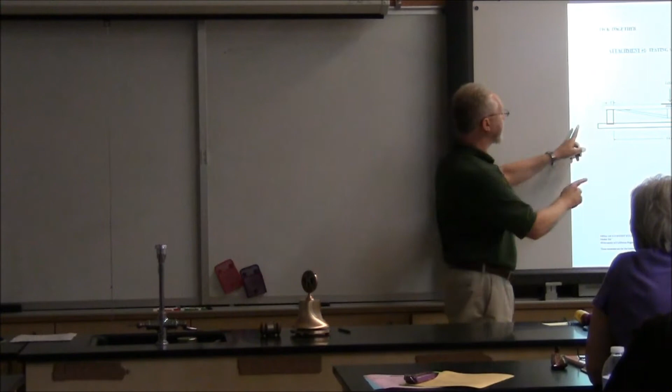So here are the dimensions for the bridge. Actually, let me pop down to the picture. Yeah, so this is basically what our test stand's going to look like. It's made of 2x4s. We have some vertical supports here, these 3 pieces of the test stand. They're spaced 14 inches apart, and the students have to build a bridge that spans this. Then we put our testing apparatus on the top there, load it up, and see when it breaks.

And so the dimensions are here. I won't go through them all in great detail, but we have a maximum length, maximum width. This is the only bridge type where we need a roadway; the other 2 bridge types don't need a roadway, but this one does. And so you have limitations on the roadway. Also, what's unique about the popsicle stick bridges is the type of construction you can use is unique to the bridge type.

Let's see, some other rules. It has to be labelled. Make sure there's a label on the bridge. There's no kits allowed. I haven't seen a kit out there. I don't think I'd recognise one if I saw one. So just take some popsicle sticks and build the bridge.

This is one of the most confusing rules. This is the 50% rule. So we'll just assume that this is a popsicle stick. It says that a maximum of 50% of the craft stick's total flat surface may be glued. So the craft stick has a top, has a bottom, and then has an edge around it. The edge is not included in the 50% rule.

Because you've got the stick with a top and a bottom surface, 50% of the stick's flat surface is on the top, and the other 50% is on the bottom. So that's 100% of the total stick's flat surface. And so if you take another stick and you glue it on there, so that the top of the stick is totally glued and covered by another stick, then that's it. You've glued 50% of the flat surface. You can't glue anything else. So if anything is attached to the bottom of the stick, you've just broken the 50% rule.

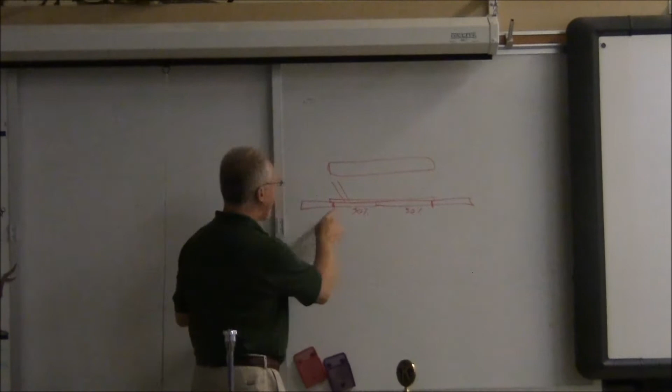Okay. The bottom 2 sticks: this stick has half of its stick glued to this one and half to that one. So you can actually attach something else here, because even though it's 50% of the bottom surface, there's another 100% there. So this 50% actually only represents 25% of the total surface. So you can still continue to glue more on here, or you can glue something on this one, and that's okay.

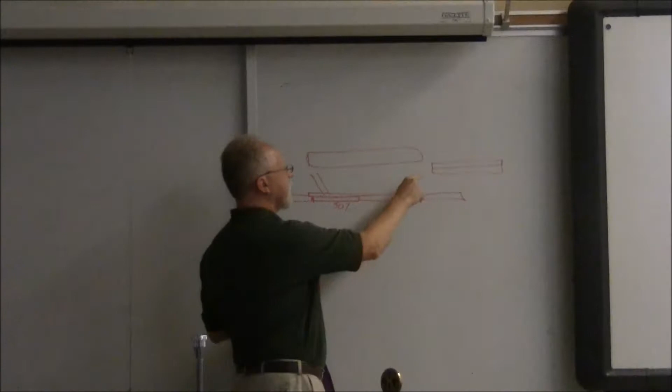So we don't really go through and look at all the sticks to make sure that they're all exactly 50%. But what you want to avoid is having sticks where there's 2 sticks totally glued on top of each other like that. Lamination? Lamination, exactly. That's what we call lamination. Because now both these sticks have 50% of their surface glued, you can't attach them to anything else. So this pair will just be floating in space. They can't be attached to anything, unless, as you said, you attach to the edge. But that would be very weak.

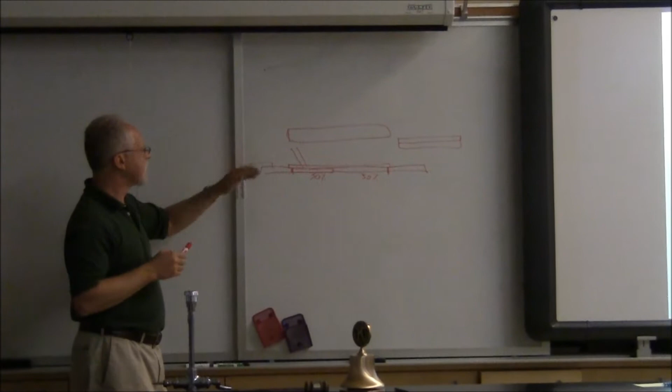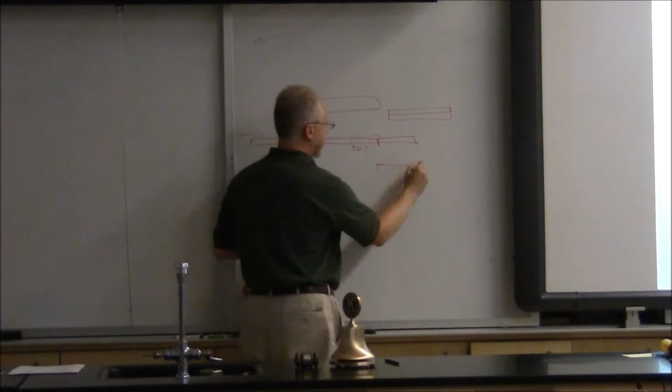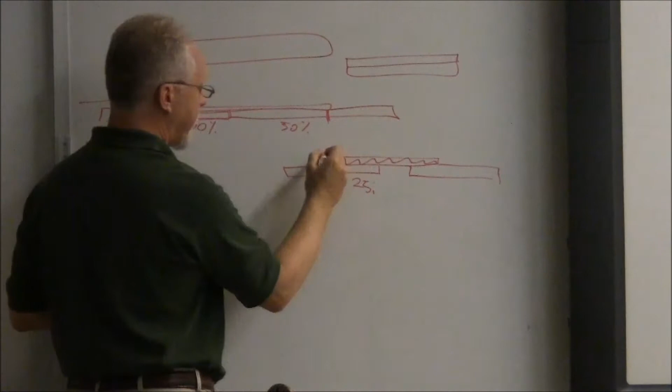Okay. So that's the 50% rule, and then you can do the math with other things. 25, 75, 33, 66. You kind of get the idea. And then again, that's eyeballing too. So if we have a stick that's like this, and we bring one down, and this one is attached 50%, this is actually 25% of this red stick. Because there's 50, there's 25, there's the other 25. You can actually glue one here and have half of that. So there's still a little bit left, so you can actually do the rest of that with another stick there.

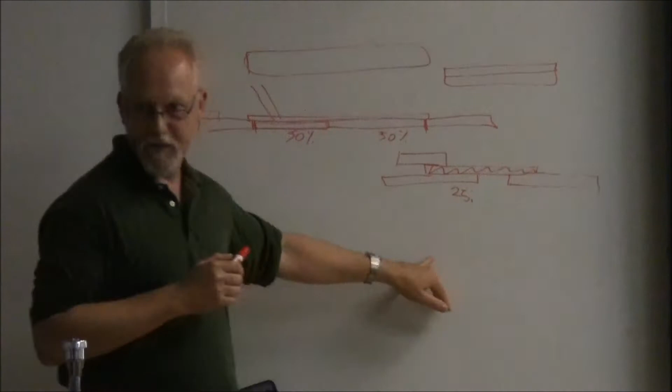So we have to look at each stick, but we don't usually use a ruler, we usually just eyeball it. So what you want to tell your kids is don't make us think that it is. Don't make it look close enough that it actually might be disqualified. Okay. Is the 50% rule clear? Mm-hmm. Yeah.

On this glue again: no coatings on the bridges. So when the bridge is built, you can't coat it with anything. Don't paint it. Don't use hairspray, like some kids have done in the past. And also that applies to the glue too.

So tell the kids to build a nice, neat bridge, and only use glue in the joints. I know in the past there's been a lot of excess glue on the bridge, and the kids just paint it all over the bridge, thinking just to get rid of the glue. But that actually makes it a little stronger, and it also breaks the rule that the bridge isn't supposed to be painted with it. So it's better to tell them to take a damp sponge and wipe the excess glue off. Don't leave it to dry.

We also noticed in the past a lot of the kids use newspaper. They want to protect their parents' table, so they build it on a newspaper. And of course the paper and wood are the same thing. So when the glue's dry and you go to lift it off, the paper's stuck, they tear it off, and there's little strips of newspaper everywhere. But we can see it's not an obvious attempt to strengthen the bridge, it's just how they made it. So that's okay. Tell them not to fret too much if there's little bits of newspaper everywhere.

Bridge has to be open at the top to allow... see, this bridge is a different sort of bridge style. There's no picture there, so I'll grab the picture now, because I think everything else is the same. Oh, no, one more vital difference with this type of bridge is because of the roadway, over here.

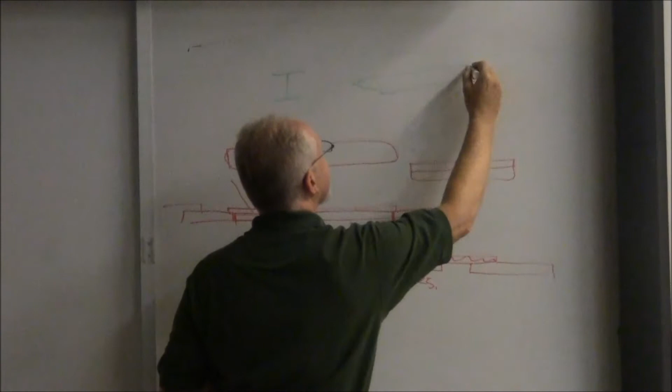I-beams are illegal. An I-beam is something that looks like this. If you look at a typical girder that you'd use in construction, it looks something like this. That's what we make our buildings and bridges from in the real world. It's 3 pieces of steel welded together like this, very strong. If you look at it from this direction, that's why it looks like the capital letter I. So that's what we call an I-beam, where there's 3 sticks glued together on the edges.

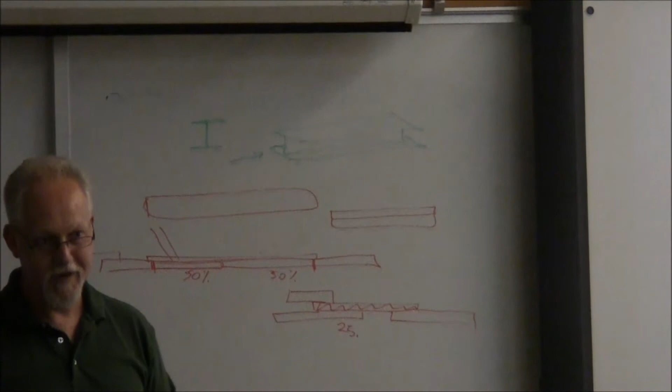Even though that's great on a real bridge, we don't want that in these bridges because the bridges are already getting to 300 pounds. If we used I-beams, we'd break our test apparatus. Our limit on our scale is 450 pounds. So that's the main reason the I-beams are illegal. But T-sections are okay. So if we take away one of those sticks and make it look like a T, that's okay.

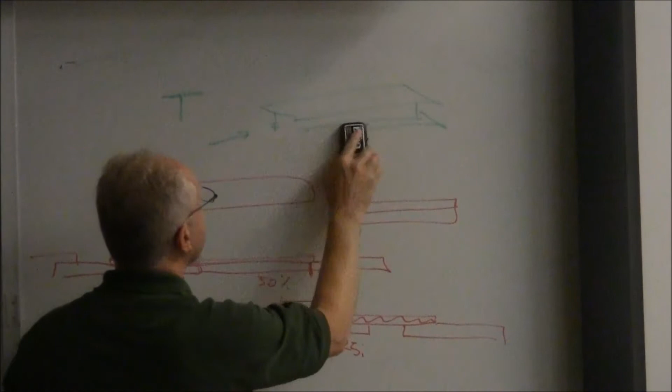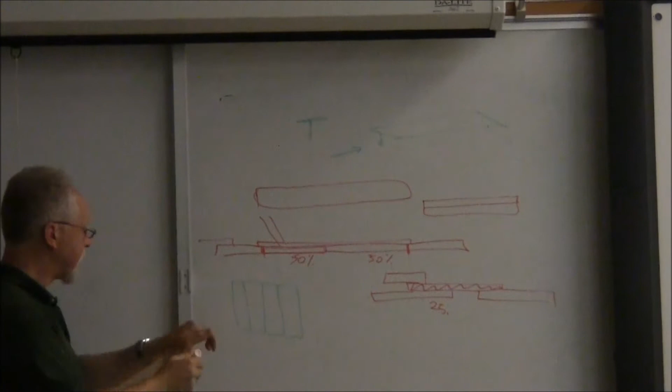The roadway is special compared to the rest of the bridge. We actually encourage that you use the sticks like this, looking down from the top, with all the sticks glued along those edges. This would be the roadway, because you have to have a smooth, continuous roadway for traffic. In previous years they always said you could bring a Hot Wheels car or some little toy car, and as long as the car can roll from one end of the bridge to the other, that's a continuous roadway.

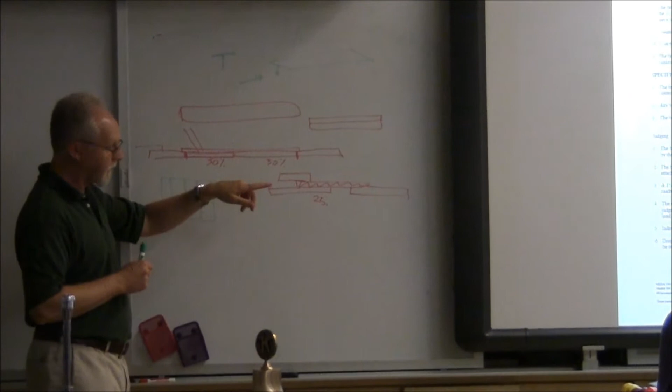Because in the past, some kids, I guess fighting the 200 stick rule, made a roadway that isn't continuous; it looks more like a ladder laid down. But this style of bridge must have a continuous roadway. And the roadway is the only place where you can do this horizontal lamination, where you glue the sticks right next to each other.

But because those sticks are all glued on their edges and they're extremely thin, this whole structure is very weak. So you want to reinforce it underneath, looking from the edge of the bridge. This is where you would use these other sticks that come under here to support the roadway from underneath. If you look at those from the end, that's why they look like this T-section. But tell the students, don't be tempted to put another layer of sticks underneath there, because that makes the T into an I, and that's going to be illegal.

And that's it for the rules. So let me actually do this. I'll get back to main screen. Escape, maybe? Escape, and then,

so these are the roadways that I was talking about on these bridges. This bridge doesn't have a roadway, so this one would be disqualified because it doesn't have the roadway. Neither does that one there. And you can also see that these bridges are very long and spindly, they don't look very strong, so they wouldn't have tested very much anyway.

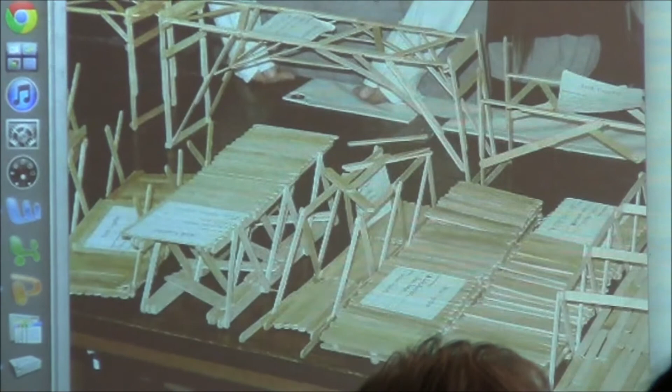So the best way you can do that is you have access to some wood. You can build your own test stand that looks just like ours, just some 2x4s. With the vertical parts spaced 14 inches with 3.5 inches high, just as you see in the rules there. Click.

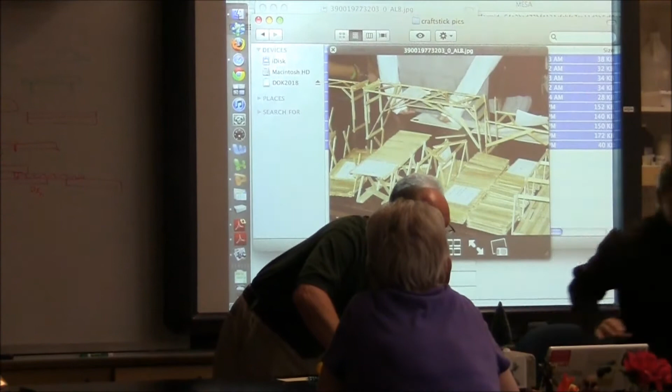Here's some more. And here's an interesting looking bridge. Looks like a stack of pancakes. And as you can see, they tried to make the feet strong, which is a good idea, but then the middle was kind of weak. And even though this looks like it might be illegal, actually it wasn't. It was okay. But it came out very heavy, and then when you do the strength to weight, it didn't actually come out very good.

This one again has the nice roadway, but then you can see these pieces down the bottom here are kind of weak, so you may want to think about some ways of strengthening those.

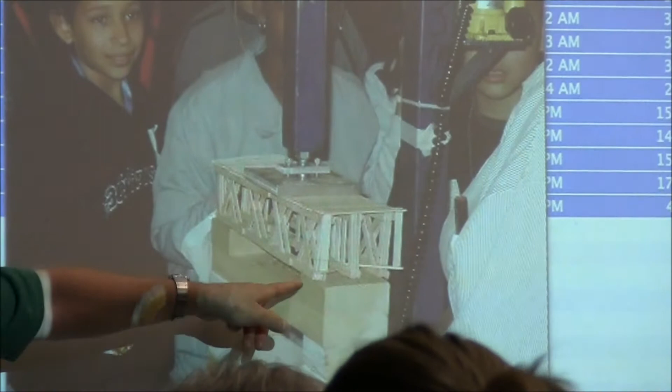Here's a shot of one of the bridges on the test stand. So here's our 2x4s that are made to span there. You can see how the bridge is resting. So there's 3 little rows of cross sticks there holding the vertical supports, and then there's the roadway. So here's our test stand with the test plate. The test plate comes down the middle of the roadway there, and then we start loading it up.

And also what's important here is that these 2 legs here are exactly flat and parallel, because otherwise if it's not on the test stand and if it starts to rock a little bit, that's when all the forces start to get asymmetric, and that's when the things start to fail. So the best thing for any of the bridges is you want to have, actually let me go back and start with a little bit of design principles.

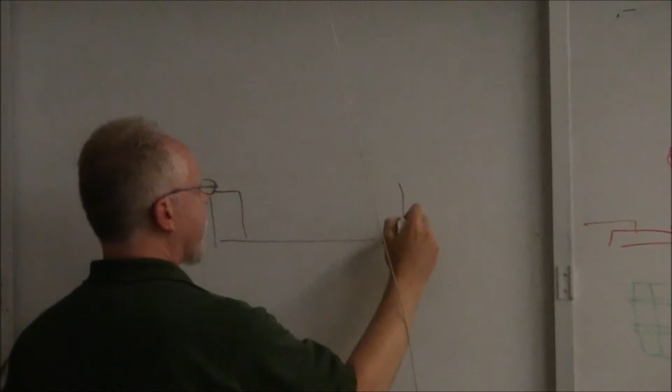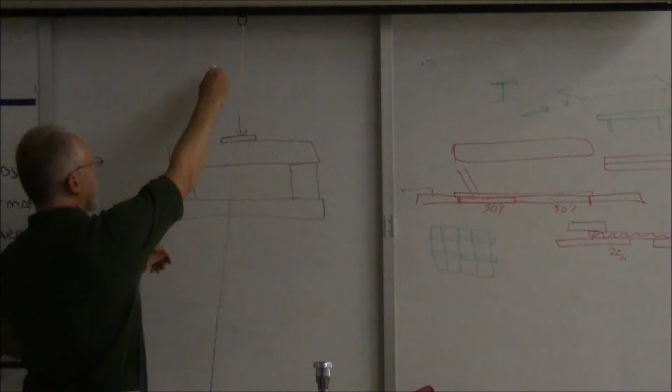So all the bridges are going to have the same sort of testing, where we have the test stand. I'll do the bridge in a different colour. Whatever your bridge looks like, it's going to be some sort of box-shaped thing. And then we have our test plate goes on the top, and then we apply a load this way. And because the forces are equal and opposite, when we apply a load this way, the bridge via the test stand pushes back this way.

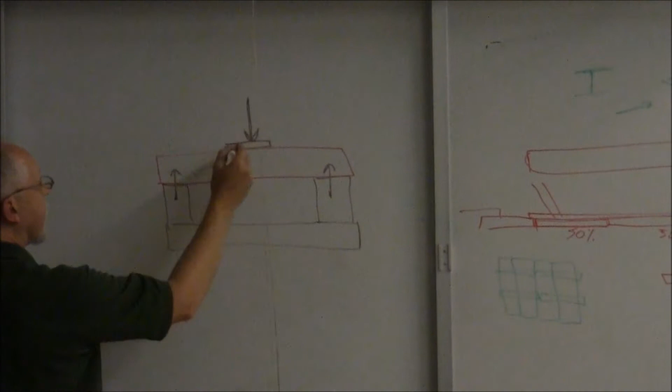And because we're loading in one point there, and then the test stand is pushing back at 2 points, then the force is divided equally between these two. And so basically you can imagine a vector coming down from the applied force to each of the test stands pushing back. And so there's going to be this 50% partition between each of the legs of the test stand.

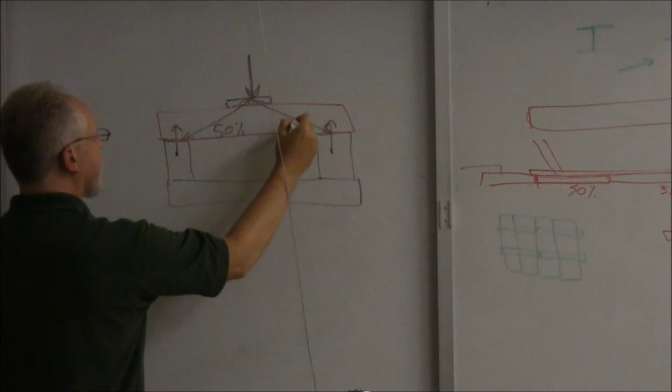So, and I'm saying that because your bridge has to be exactly symmetrical around that testing point. So if the left of your bridge doesn't look like the right of your bridge, then the structures on the left and the right are not going to respond to the forces equally, which is what you want. So the strongest bridge is going to be a symmetrical bridge.

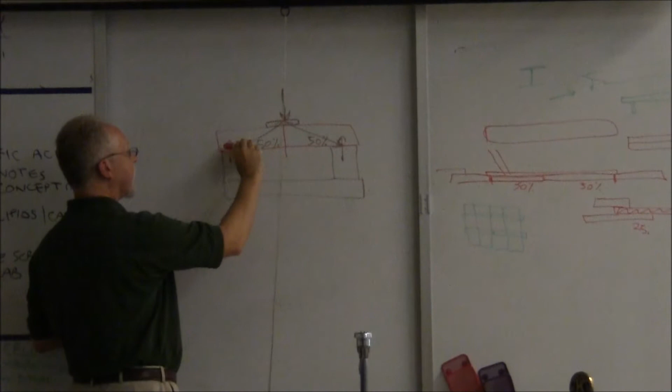And whatever else is in there doesn't really matter. The most important thing is to make sure that everything on the left and the right is symmetrical. So you can imagine if you put a mirror here, then what you see on both sides should be exactly the same. And that will be the strongest type of bridge, regardless of what the design actually looks like.

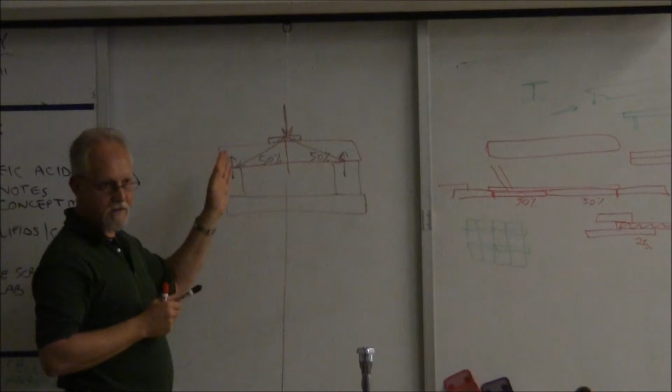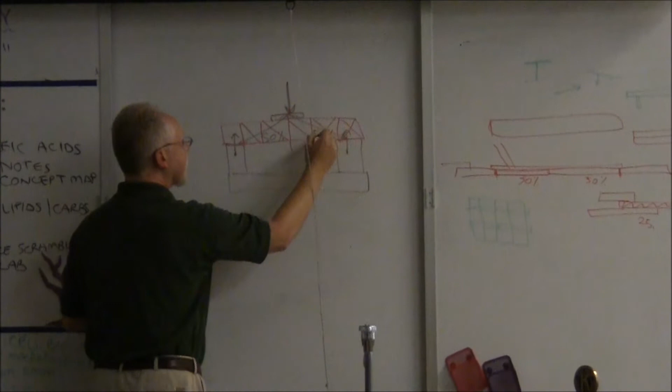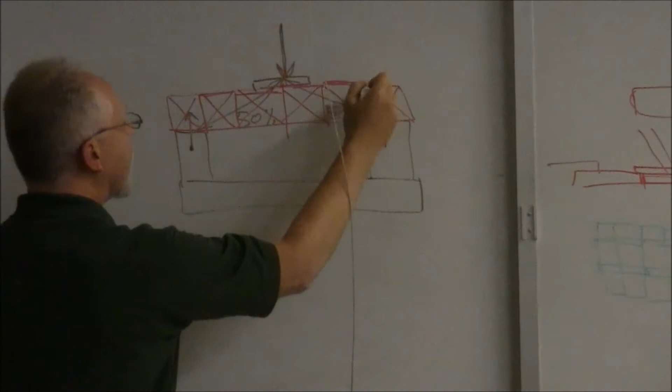Because one of the things with the cross sticks, and especially with the balsa wood sticks, is when the students start making typical box sections where they use diagonal reinforcing or even cross reinforcing, if these sticks aren't exactly the same length, if you look at it up close, you'll see that these things might be up and down, a little higher over here, and then when you start to load it, this is when you start to get asymmetry in the forces coming to the test stand.

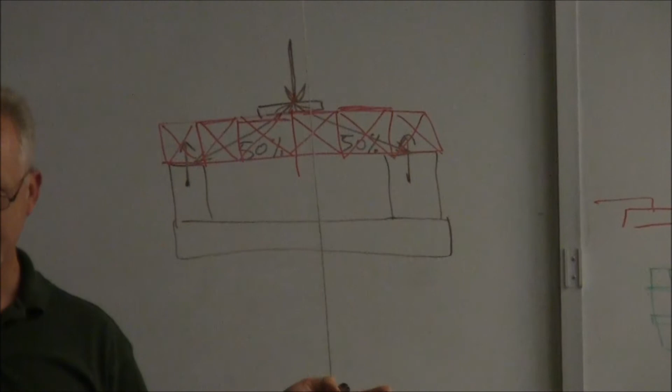And then it's just like standing on one leg. If you hold 500 pounds with 2 legs and you lift one leg, suddenly I'm holding 500 pounds on one leg. So it's very different, right? So you want to make sure that everything is all balanced.

We often see when we start to test the bridges a rotation in some of the bridges. That rotation is a great indication that something wasn't symmetrical. And when it starts to rotate, you start to get transverse forces coming in, and then it usually fails very quickly after that. And the strongest bridges, the bridges that we've tested at 300 and 400 pounds, have always been beautiful and symmetrical.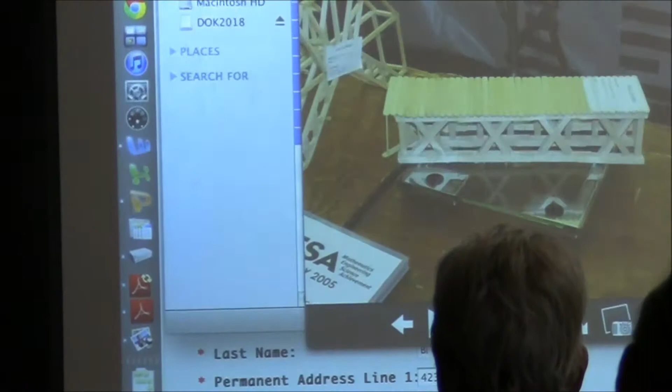Here's another nice example. There's the roadway, and the discoloration here is the label with the school and the name at the end there. And underneath you can see there's a nice strong cross bracing with 3 or 4 layers of sticks. That's all legal, and they've actually tied these sticks with some other pieces along here. And these sticks down here are only glued at the end, a very short joint to its neighbour, and that's all fine. That's all within the 50% rule.

And this is a good design because when the test stand comes up under here, there's a lot of structure to channel the force from the top of the bridge to the ends of the bridge, and it's tied up in the middle as well. So these are good, strong sort of designs.

There's another nice one. Looks very similar to the previous one, except this one they've made it bend down a little bit. I'm not sure that does anything for the strength of the bridge, but it does change the appearance. Don't forget, not only is there strength to weight, but there's also creativity and craftsmanship. So if everybody's bringing rectangular, square bridges and someone brings something like that, it's going to get the judge's attention. They go, hey, this is a nice design. It looks a little different.

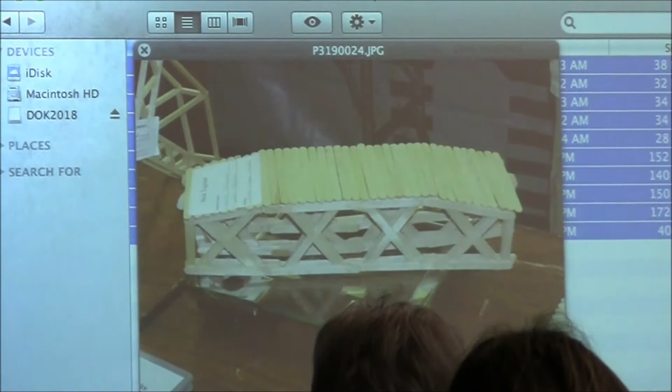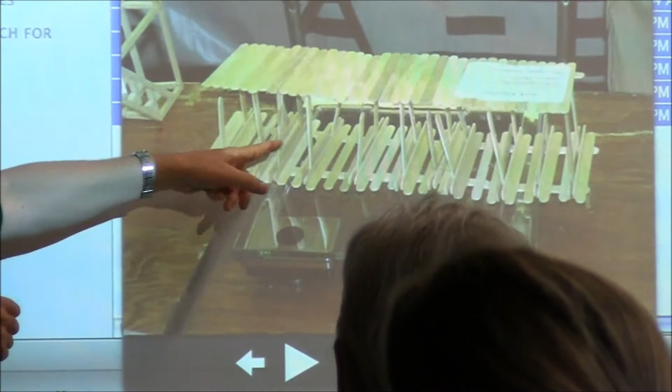This one, is this a strong bridge? No. Because it's just got these little vertical sticks, and they're going to snap, and they're not joined to their neighbours. It would have been better to take a lot of these sticks out and make sure these vertical ones were all joined to their neighbours, so they're stronger. So your job as an advisor is to help the kids understand what's going to happen to the bridge and the forces involved, and even though this might look like a nice bridge to them, it's not strong.

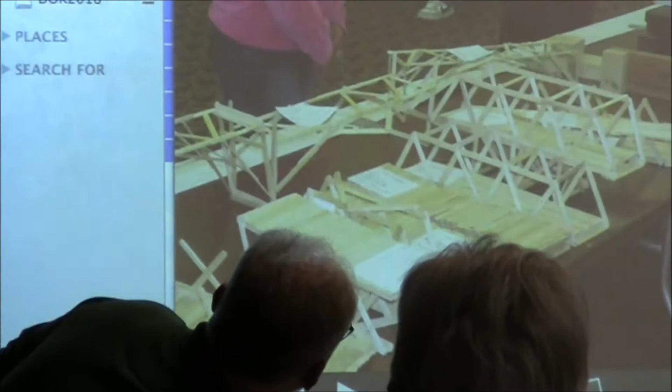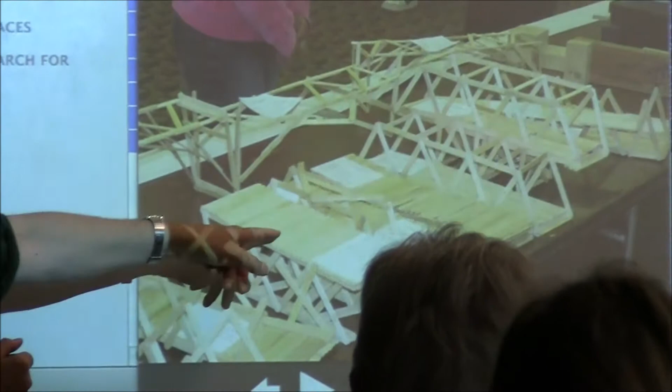Another selection of bridges here. Yeah, so here's one where there's one of the rules that says there has to be a clear and unobstructed access to the roadway, because we're supposed to put the test plate on the roadway. So see this bridge here, the roadway is down here, and then we can't get the test plate through the structure because of these diagonal braces across here.

I think I'll stop there and move on to the next one.

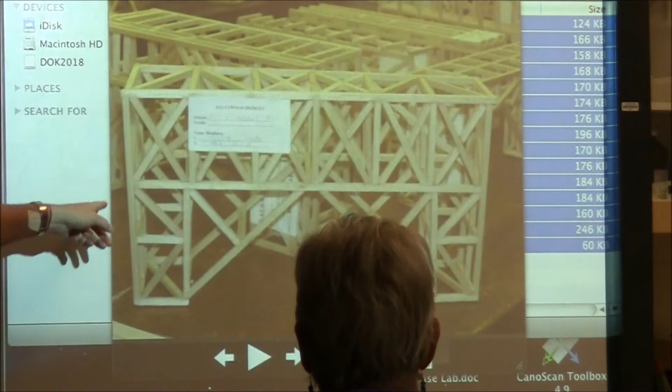It's very brutal. So the balsa wood bridges are the nicest looking bridges, I think, in our competition. And you get some really nice looking structures that actually start to look like real suspension bridges. So this is a very nice one. And one thing I'd like to call your attention to on this one is notice the symmetry. Look at the left of the bridge. There's the middle of the bridge, the left and the right. Very, very symmetrical. This is a very nice bridge.

And one thing that we've always seen in the past is, actually it's a golden rule always, the bridges that win creativity and craftsmanship always win strength to weight. And the reason is because a symmetrical bridge is usually a neat bridge. It's a nice looking bridge. Everyone looks at it and goes, ooh, that's a nice bridge. And because it's symmetrical, it's very strong.

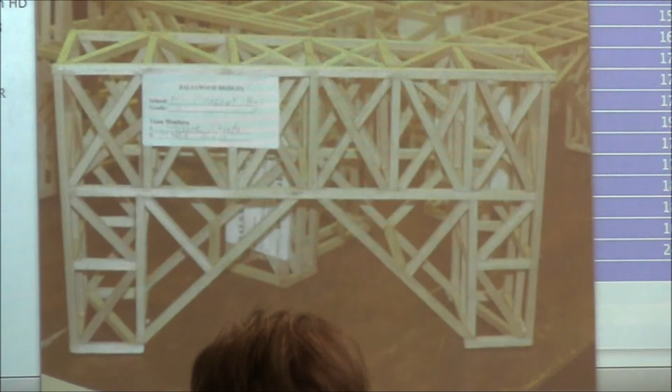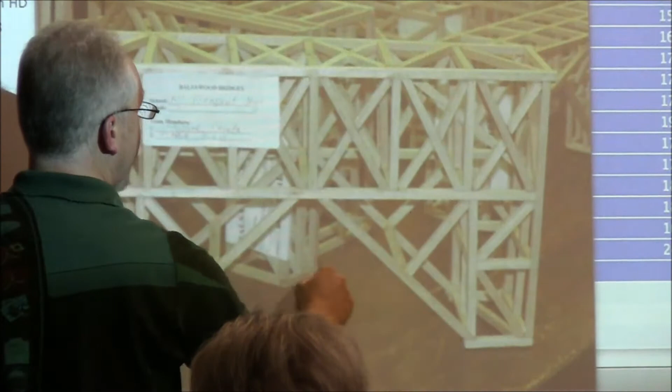You can also see they've done a lot with the, this is where the bridge is going to sit on the test stands. They've got some nice diagonal members taking that force from the test plate down to the legs. And there's lots of little support structures to make sure that's a nice strong connection. So this is good.

Here's a variation on the theme. This is kind of like a skinny bridge. This bridge reminds me of those moving billboards they have on trucks, right? But this is fine. There's nothing to say the bridge has to be big and wide. And so what they've done is, instead of making the bridge unnecessarily wide, they've made it narrower, and now they've got triple strength here, right, instead of just a single beam or a double beam. So this is good. So you want to start getting your students thinking about that too.

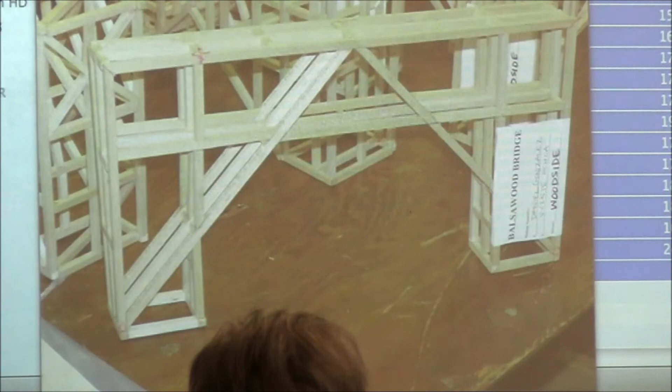Don't make a bridge that looks like everybody else's bridge. Think about where you've got a budget with this bridge. 95 grams is how much balsa wood you can use. So you have to put your wood where it's going to do the best job in resisting the load from the test plate. So this one is very well thought out.

It's like, well, the plate's going to go here. We want to transmit the force to the legs, and then we'll make the rest kind of look like a bridge. And these are very long and skinny, so they're very weak inherently. So you have to try and reinforce them at various points. You could also put more pieces in here and try and reinforce this. So this is a nice sort of style.

And there is a minimum of how wide the bridge can be, and they made the minimum, but they didn't go to the maximum. And so they used their wood budget very carefully to go for strength rather than width. Which is strength to weight, right? It is strength to weight, yeah.

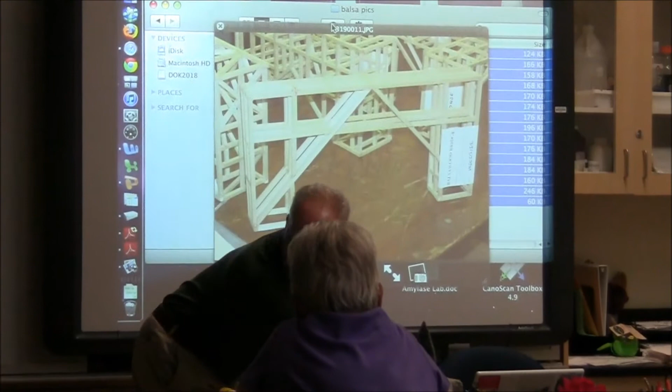So if you did 95 grams of wood on a scale, how much would the glue add to it, do you think? About 10%? Oh, well, I misspoke. It's actually 95 grams constructed. Right. So that includes the glue. And the tag. The tag is minimal. And actually, it just adds all up. You laugh at it. Actually, what we've done on some days is if it's 96 grams, we take the label off and weigh it again, just to make sure it's not the label.

So the glue would add another 10, 15? The glue is typically about 20% of the weight. Yeah, because balsa is very light. The craft stick is less, but the balsa is very porous and very light. And so the glue actually becomes a big percentage of the total mass. Yeah.

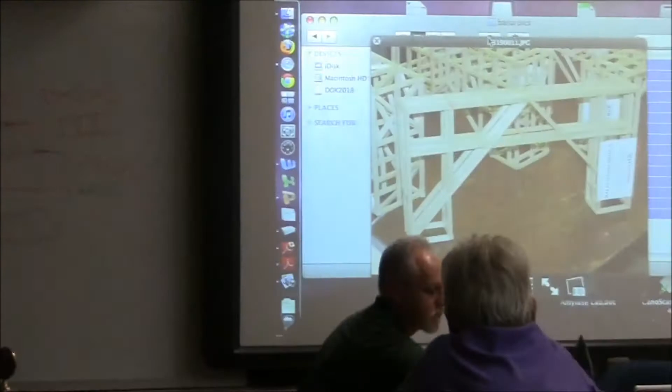Here's another nice bridge, more of an open structure, but again, notice the symmetry. Beautiful bridge. And they've got the same sort of structure. You know, they've got a strong thing here with some diagonals going down there. And then they put some cross pieces in to try and strengthen all these pieces here, which is good.

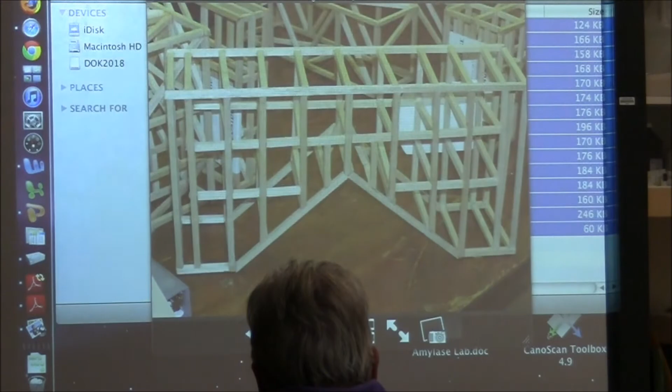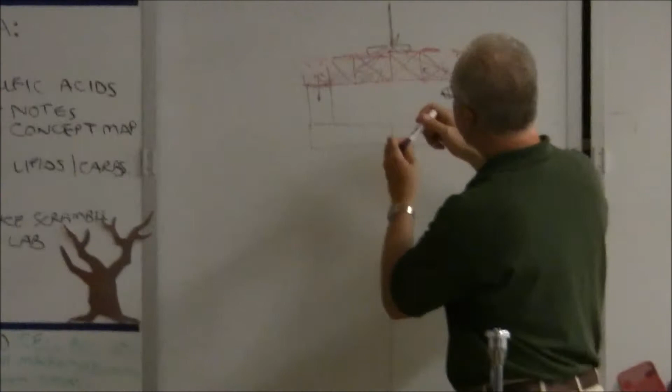And don't forget, like these corners here, they're really not involved in the crushing, because the forces go this way, and anything that's sitting out here in this area is usually not supporting this unless it's tied to the pieces that are going to get broken. So you can imagine that as the forces start to get applied here, you've got some pieces coming down here, and so we've got a compression force coming down on this one.

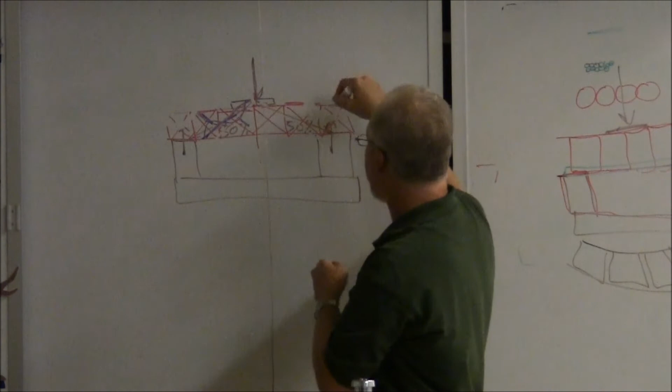And so what's going to happen to this is it's going to start to move around, and it's going to try and buckle into like an S shape or something like that. So you're going to need to have pieces on either side of it to try and resist that. Okay. So if anything that's here out on this side of the bridge is not strengthening anything that's here, all this is wasted, literally dead wood. Okay, because it's not being involved in the crushing. So it's adding to the weight without adding to the strength.

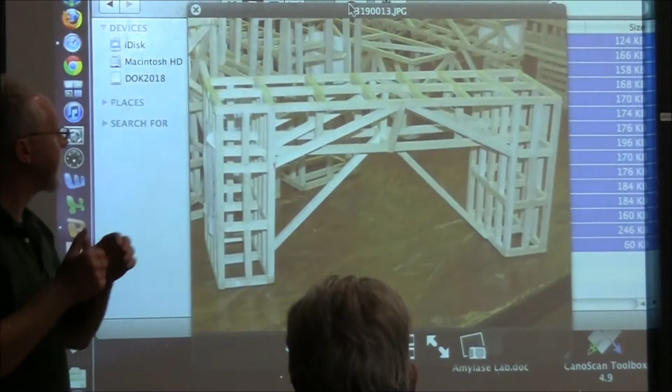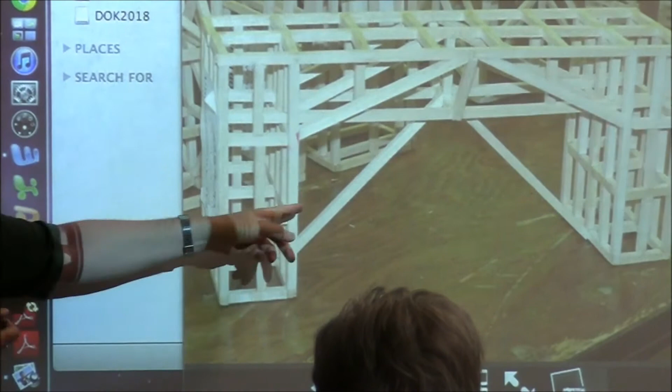So you can actually try and get rid of the corners of the bridge, and you will see that in, I think, some of the pictures here. There's another nice symmetrical bridge. Again, very strong here in the middle, but the only problem with this one, what can you guys say about this one? Once again, we have these pieces coming in here. Look how long and skinny they are. And there's nothing to stop these ones from bowing or breaking. Right? There's no side reinforcing.

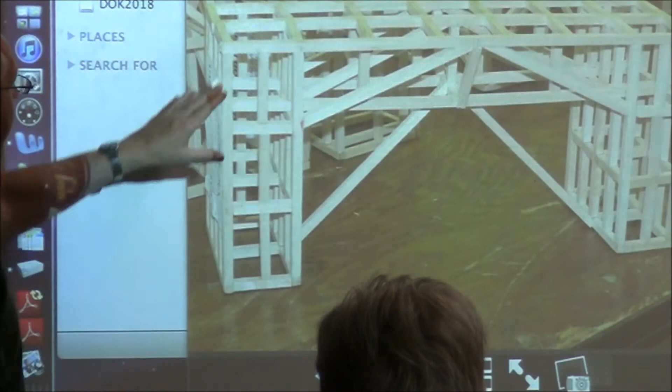So what you want to have, these are nice. You've got these nice strong legs, but as I just said, the leg part up here does not do very much. So take this wood from here and reinforce these pieces and make it strong.

Dr. Kellogg, can I ask a question? Yes. I had the question once about the wood being soaked in water in order to bend. What is your ruling on that? Oh yeah, that's fine. There's nothing in the rules that says you can't do that. And some students actually did it a couple of years ago, and they made a beautiful bow bridge. Oh. Woodworking it. Yeah, so they soaked it until the fibers got soft, and then they gently bent it and let it dry, and then it stays in that position. That would pre-stress the fibers, it kind of bends the fibers, and usually that strengthens them. So that's a possibility as well.

What about getting liberal with the glue all over the member? No excess glue on the bridge. That's one of the rules. Just at the joints. At the connection spots is fine. If the whole bridge looks like it's been dipped in Elmer's and then dried, you can see it actually. After Elmer's dries, there's a little bit of a sheen to it, so we can actually tell. And again, given the mass of the glue, I'm not sure the added strength from the extra glue would help the weight.

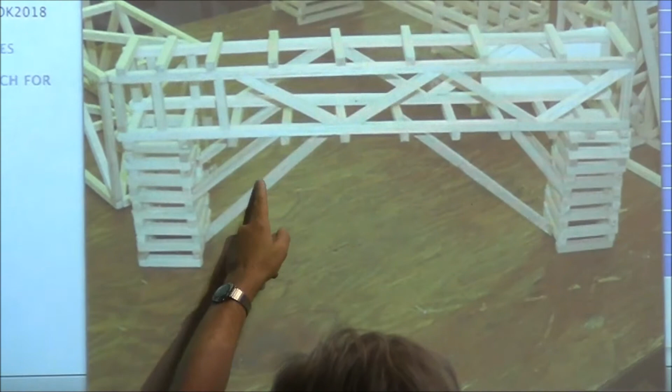There's another one with nice strong legs, but again very weak. They've got these pieces here, which isn't too bad. But look, we've got a test plate here. This part's just going to snap right there. There's nothing pushing back against the test plate there. You're saying there's a minimum height? There is. It's got to have legs. Yeah, it's got to look basically this sort of shape, like an inverted U.

This one's nice. It's all very Venetian blindish looking. Looks nice. But again, it doesn't have anything. This part looks strong, but then this part attached to here is very weak, and it's only through here. And so when you start to crush this bridge it's going to start to go like this, and then it's going to start to lift off the test stand, and then just going to break there. So I would put more diagonal bracing in or something like this. There's another one that's nice. Looks strong here.

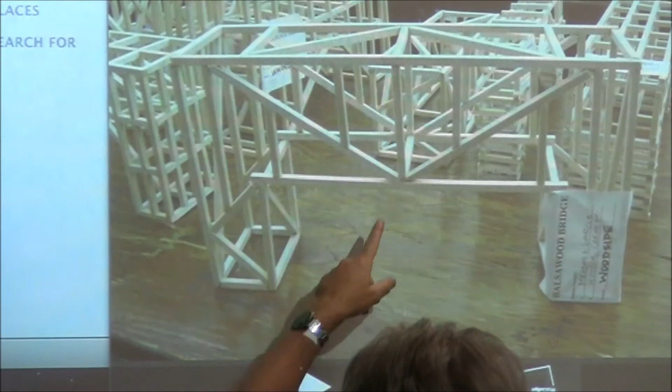They've thought about the test plate here. That's nice, but again, missing some diagonals here. There's another nice one. They haven't bent the bridge, but instead of making it straight, they've actually used shorter pieces and glued them and made this very strong. I remember this bridge. This was a very strong bridge.

So unfortunately, this is not the student's fault. He didn't get any advice from you guys or from his parents, right? Because someone gave him the wrong rules. He was in the wrong grade, he saw someone else's rules probably, and he was in high school, so he built his bridge using middle school rules. Wasted his time. I feel sorry for the kid because it wasn't his fault. Isn't that illegal wood too? Absolutely. This is totally illegal for balsa wood. There's all these laminations which are totally illegal. And so, yeah, I feel sorry for the kid who put all his time into the bridge.

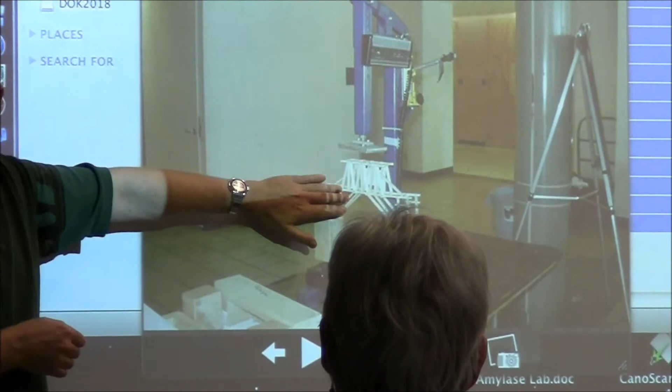And then last shot, there's a balsa bridge on the test stand. And as you can see from this bridge, once again, this is too much height. See how long and spindly all the legs are? Looks like a daddy long legs. So it's not going to be very strong. So you can actually drop the height of the bridge, keep it within the dimensional restrictions of the rules, and take all this extra height and put it into strength.

Okay? So if you don't have any other questions, I'll hand it over to the next competition. Here? Yep. Alright, so we'll do this. This time I'll start with the pictures first, then we'll go through the rules.

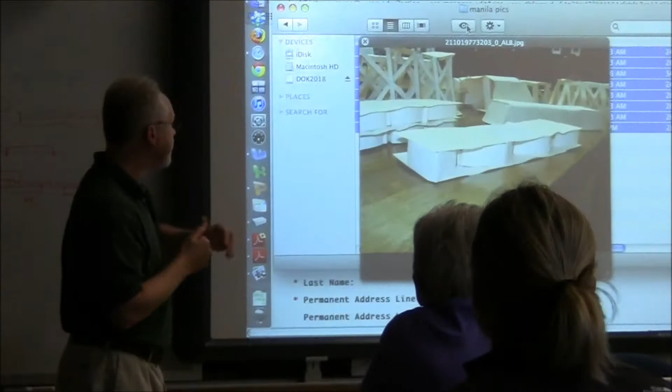So the manila mechanics is different to both the craft stick and the balsa wood bridges in that you're not starting with wood, you're starting with paper. And even though they're the same sort of materials, paper is kind of the weaker form of wood. And so from a construction point of view, you want to approach it in a different manner, because manila folders are inherently weak. And so what you have to do is build a structure.

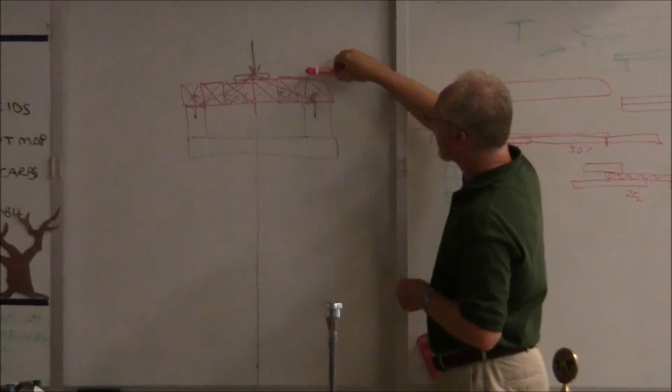You still have the same constraint. The test stand and the testing apparatus are still the same. You've got to build a bridge that spans a distance, and then we're going to load it up. But you're going to have to treat it differently because it's paper rather than wood. And paper is very floppy this way. So if you bring a bridge that looks like this, it's just going to go bouncy. And so we see a lot of the manila bridges that are very elastic when we test them.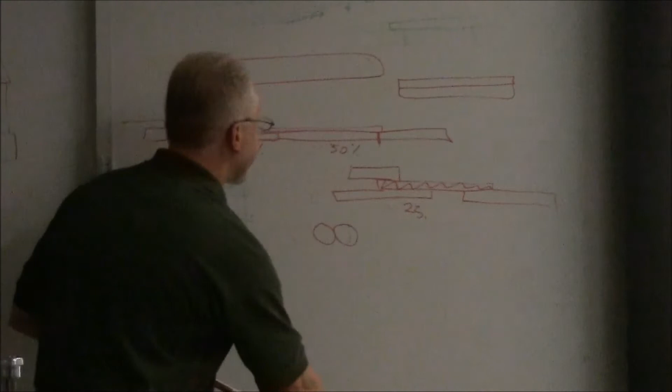And so what you want to do is change the dynamic a little bit by making a structure like this. You roll the paper up, and then if you try and crush it this way, it's much stronger. So you want to get the students thinking in a totally different way: what you need to do with the manila bridges is make a series of geometrical shapes and glue them together. Okay? So you can either roll up the paper like I showed you, and looking down from the top, if you're spanning the test stand, you can do a whole bunch of cylinders together. This is what it looks like from the side.

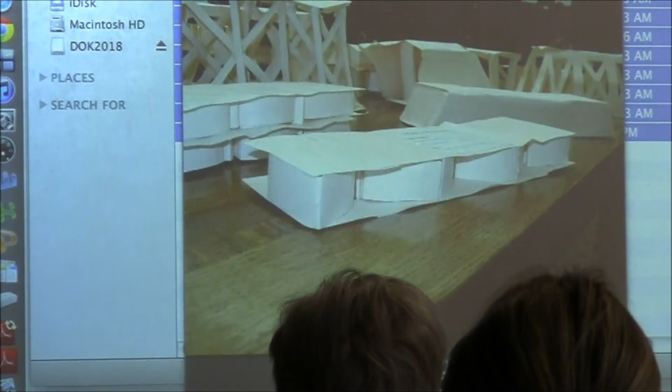And then you glue the tops and bottoms with another piece of it, and that's basically what we're looking at here, where it looks like they've used triangles glued together. So you can use circular cylinders, you can do triangular cylinders, you can do squares.

But the most important thing is that, while each cylinder may be hard to crush, we're not crushing one cylinder. So when we're on the test stand, what's actually happening, if we put the test stand here, test stand here, and then we put the plate down and we start crushing this way. There's nothing actually under this cylinder, so we're not really crushing that cylinder, are we? What we're doing is we're transferring the force to this cylinder, to that cylinder, to there.

And so what usually happens, especially with this style, when you have a single sheet of manila gluing some cylinders together, they usually end up just deforming like this. It kind of looks like a goofy grin when it's done. That's what happens on the test stand. They all just bend down in the middle there, and then the bad news about these rules is that the maximum length of the bridge is very close to the ends of the test stand.

The size of the test stand and the size of the bridge that is allowed gives you roughly a centimetre into here. So it doesn't take much deflection of a piece of paper to actually change this length by a centimetre, and then it just drops off the test stand. So what you want to do is make sure that the bridge is very rigid. Let's see if we can see some here.

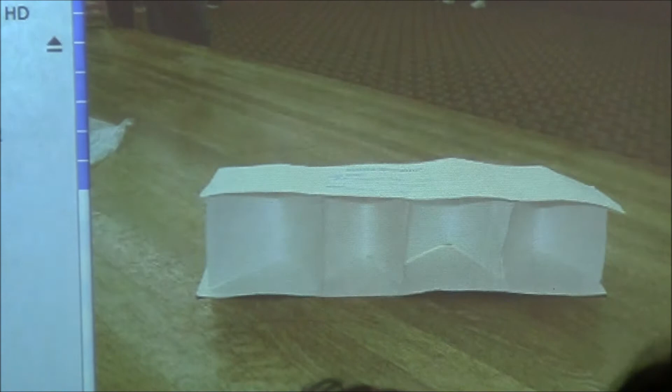And there's another one. And again, the cylinders are nice and strong, but they're not connected to each other. There's that triangle. This is one where they didn't even use triangles. They actually just used V-shaped pieces of paper looking down from the top. This one looks like this, which is nice. That's getting better. There's another one. These ones are kind of weak. I'm not sure. Don't do this.

What's inside here? We don't know. So, as judges, we're supposed to make sure there's no foreign material in there, nothing funny. So if we can't see in, we have to assume it's covered for a reason, that they're trying to hide something from us. Now, we know you students wouldn't do that, but don't make us think that you do.

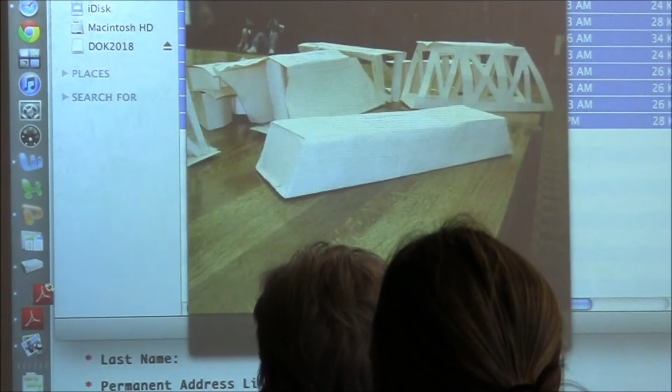Yeah, you got a question there? Is it okay if we have the little doors that open so you guys can look inside? Yeah, that was fine. Or you can just cut a little inspection hole there so we can see in and see there's nothing in there except for the manila folder, that's fine. I still haven't seen the strong one yet.

Oh, that's it. Alright, so the strong ones, you notice a lot of those bridges were very tall. Does height buy you anything in this thing? No, because we can actually bring the test stand all the way down to here. So really, your bridge only needs to be this big. And all this is added, because we weigh the bridges too, so it's a strength to weight ratio. So the taller it is, the heavier it is, no additional strength. The force is going this way, there's nothing in that.

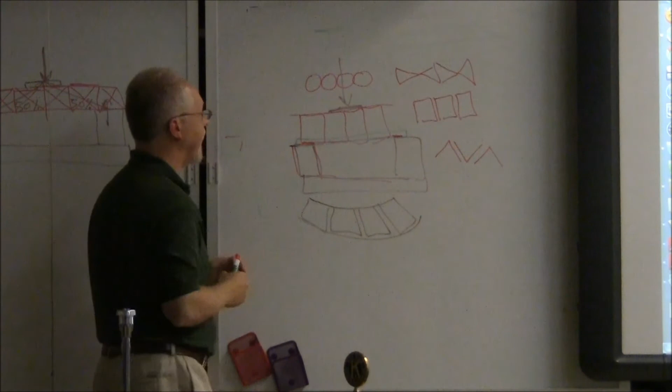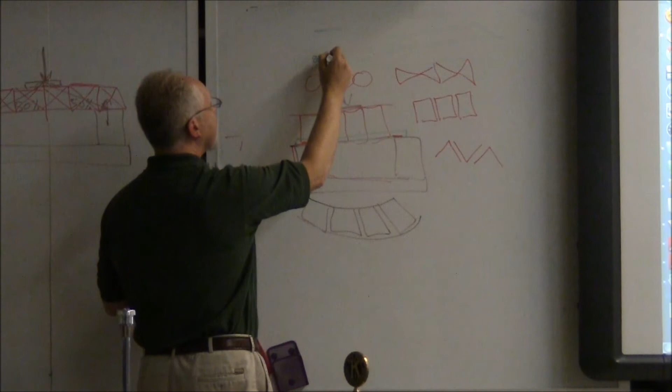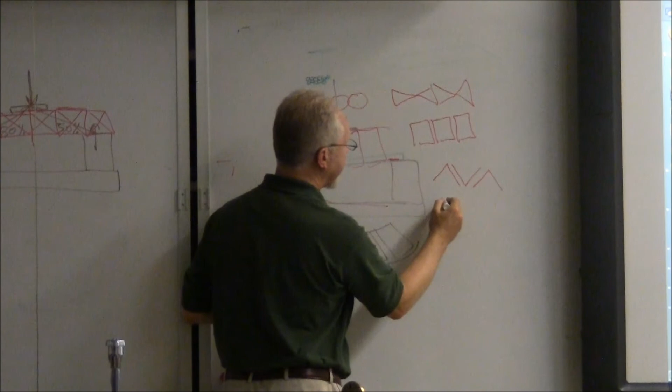So for the strongest bridges, rather than having a single layer of large cylinders, how about having several layers of little teeny cylinders, all jammed together. So when you look at this bridge from the top down, it looks basically like honeycomb. And I just realized I had some packing material I meant to bring. We received a heavy piece of equipment, and it came in a cardboard box. And at the bottom of the box was a layer of cardboard. It looked exactly like that, and inside was all hexagons, just like a honeycomb.

It was only about an inch high, but it was enough, and I stood on it. It was about the size of half of this bench. Made of cardboard, it weighed less than a pound, and it could handle 300 or 400 pounds. And why it was so strong was because all the little hexagons were joined to each other, and the little tabs were all glued to the sheet above and below. So when you start to stress this thing, there's nowhere for anything to move.

It's just like being in a crowded train, right? You want to get to the exit, you have to push somebody out of the way so you can move, right? So your bridge design for these things, just think of like a crowded room. You want to basically fill the space between the test stand supports with lots of things that are glued together, and that's going to be your strongest bridge. And also, make it about half an inch high. It doesn't have to be this big, long, tall thing. So, any questions on that?

Any comments? Manila mechanics is the hardest to make, I think, because you're basically having to make your own structure from flat sheet. And using Elmer's glue with the manila folders is very strong, because the cellulose fibers in the cardboard actually bond with the PVA glue that's in Elmer's glue. So it's a very strong joint that you make, but you have to give it time for the glue to dry. So make sure, 3 or 4 days. So if the kids are trying to make it on the night before MESA Day, it's not going to be dry by the time it comes to us.

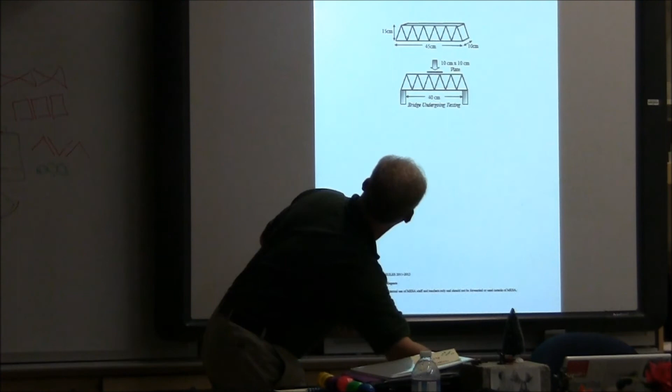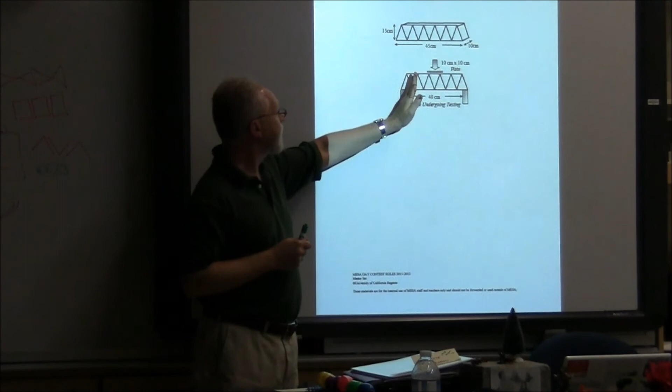Actually, let me quickly go ahead. So you notice this maximum length is 45 centimeters for the bridge. And if we look at the dimensions of the test stand, it's 40 centimeters. So that's 2.5 centimeters on either side. So as I said, it's not going to take too much deflection of that flexible paper to actually decrease the length and drop off the test stand. So the only way to stop that flexing is to make a structure that's very strong and all glued together to its neighbors. Let's see.

Materials, it's the same sort of thing, it's just manila folders. There is a maximum weight, 70 grams. So 70 grams is basically 2 folders plus a little bit of glue. The glue does actually weigh something, so don't go too crazy with that. Keep that in mind. You also have to have a way of measuring 70 grams. So I hope you all have some sort of postal scale or access to one in your school science lab so you can weigh, because 70 grams is extremely light. And then that's pretty much it. There are very few restrictions on this competition, which is good. So, we move on.

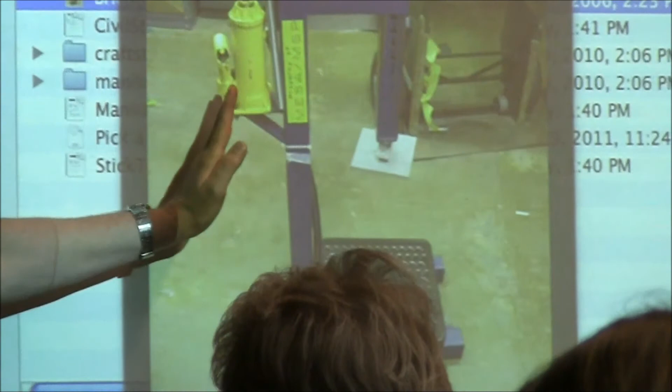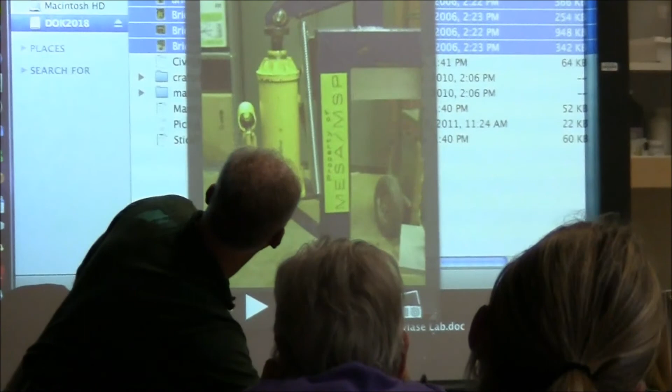So there's a parcel scale down there which will take 450 pounds, and we have a little test plate there, and then we have a hydraulic car jack, and when we crank the handle it pushes up the jack, and then it pushes down that arm and transfers the force to the bridge, and then we actually weigh how many pounds of force is being applied. There's another shot of it. There's a shot of the car jack. And then we have a digital readout from the scale so we can see how many pounds is being applied. During the testing, we have 2 people calling out the numbers, and the highest number that anybody sees is the maximum load you get.

And what usually happens is we keep testing while the numbers go up, and then you get a crack in the bridge somewhere, especially for the wood bridges. And then you keep on loading it, but usually after that first crack it just tends to go down. When the numbers stop increasing, we call it quits on that one, and we pull out the maximum number. And then we calculate strength to weight based on that. Alright, so let's look at some bolted bridges. One of the funnest things is spaghetti competitions, the international spaghetti competition.